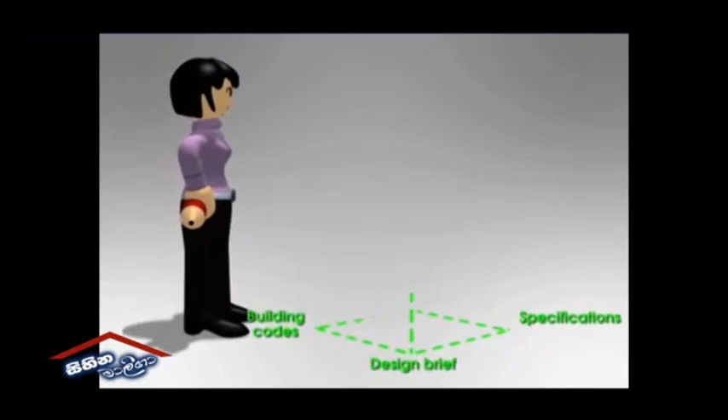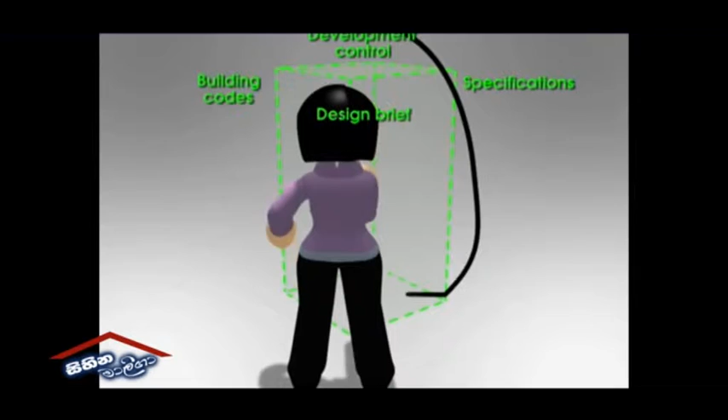The architect is the grand designer who creates the form or body of the building. A building usually begins with an idea or a concept in the architect's mind, but the architect doesn't just design. She is the one who transforms the specifications from the developer into a working blueprint. She makes sure that the building complies with the regulatory and technical requirements, while keeping in mind the primary considerations of materials, functionality, aesthetics, and the environmental impact.

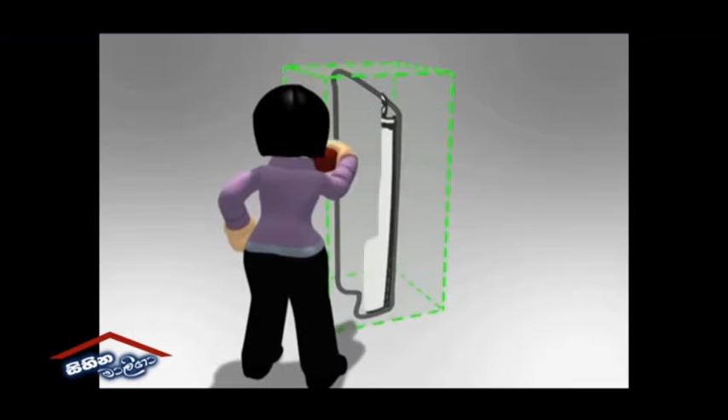But the architect cannot work alone. She needs to work with others to translate her master blueprint into a physical building.

The civil and structural engineer is the math and science whiz that produces the structural designs, setting the bones and joints to form the body of a building. A C&S engineer needs to decide how to build a solid frame and determine the location and size of every beam and column in a building. He also has to make efficient use of materials to construct the building in an environmentally sustainable manner. In other words, a C&S engineer is responsible for creating a practical and safe structure that can withstand anything the weather might bring: the wind, the sun, the rain, and the temperature changes.

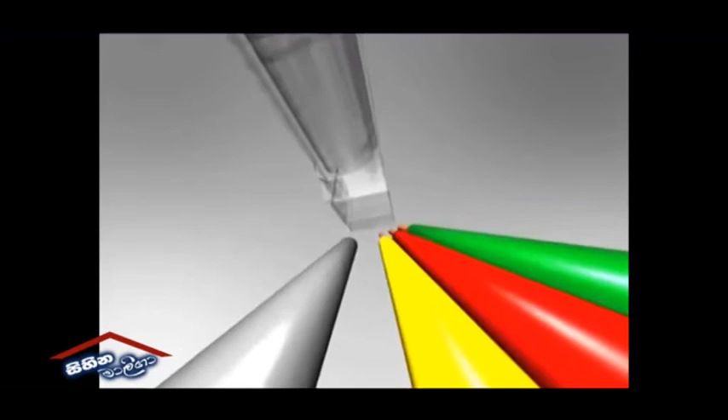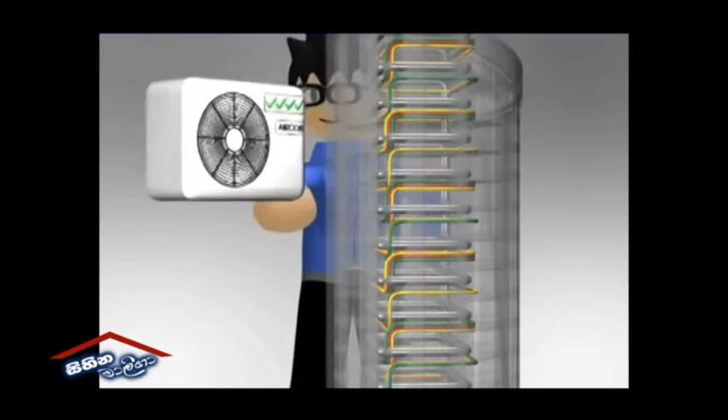While a C&S engineer is the structure specialist that sets the bones, our M&E engineer is the expert responsible for connecting the veins, injecting the life force that brings a building into being. Every modern building needs electricity, lights, air conditioning, and ventilation systems to become a living, breathing, habitable place. Our M&E engineer is the person that takes care of that, making sure of the efficient use of energy and water and quality indoor living.

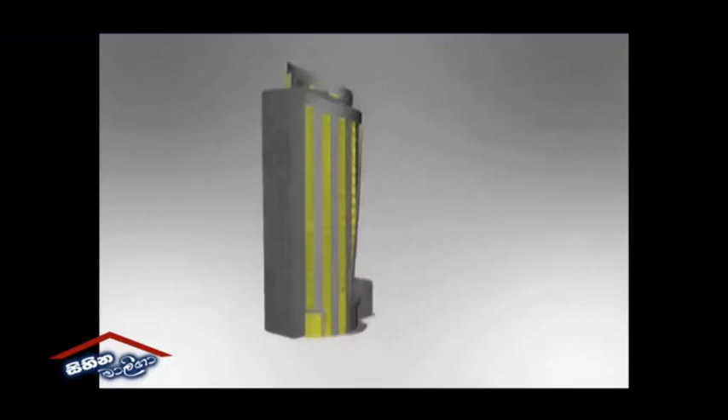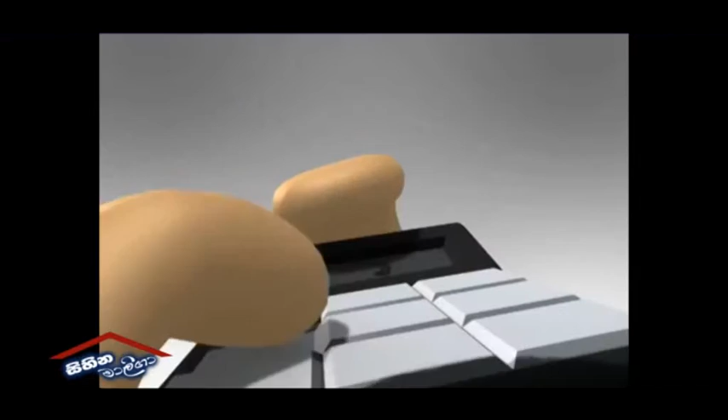For every project, there must be someone to take care of the money issues. The quantity surveyor is the one that manages the costs of a building project, from the initial calculations to the final figures. She must be skilled in the balancing act, analysing the numbers, assessing the risks, and preparing the tenders and contracts. That's a critical role, consolidating all the information and numbers to come up with the tender specifications and contracts, all while ensuring that everything meets the required standards and quality.

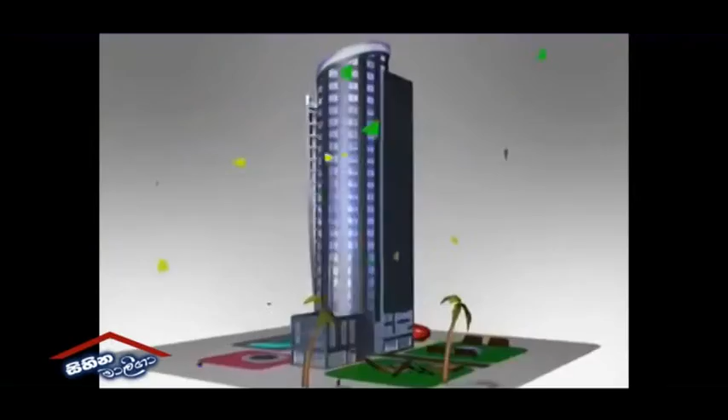As the actual construction starts, someone has to ensure the smooth running of the project. The project manager's work revolves around 3 very important elements: time, cost, and quality. He becomes the key overseer once construction work begins, organising the resources to turn plans for a new building into reality. That means planning the time frame for all the necessary tasks, getting the project started from the initial stage of drafting to the final coat of paint, and to ensure that a project gets completed on time and within budget.

So the building is completed, the people have moved in, and the work is done. Or is it? Buildings are built to last for many years, some surviving several generations, but proper maintenance is necessary. The facility manager is like a doctor who performs regular health checks on buildings to ensure they are well maintained and in tip-top condition. Like a good caretaker, a facility manager looks after the needs and interest of the building and its occupants, and comes up with ways to continually improve a building's amenities and services. That's to make certain that a building stays healthy and its occupants happy.

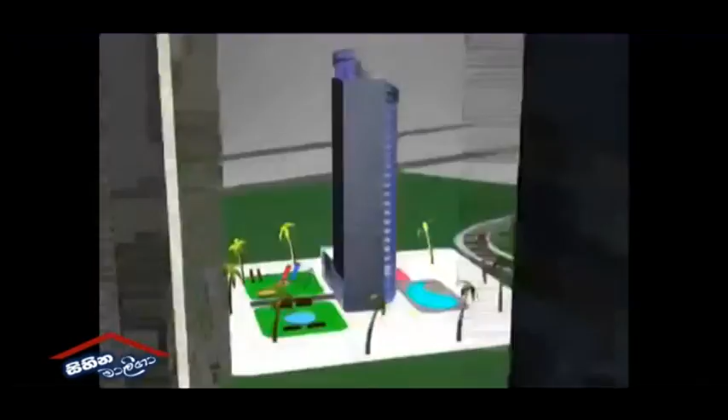These 6 professions form the core of a typical team in the construction and building industry. Together with many other unsung heroes, they are responsible for building the roofs over our heads, all this while taking care to preserve our environment and resources for our future generations. As the industry continues to grow, there are plenty of opportunities available for all talented and creative young people to join the sector and be satisfied with a career that makes a difference.